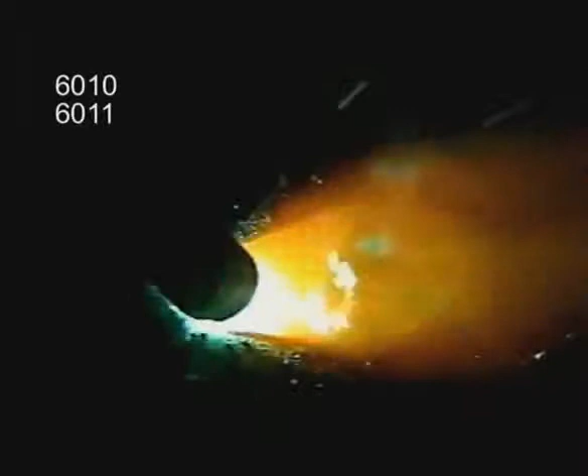All the common rods used for welding on carbon steel have characteristics that make them better suited for different situations. The fast freeze rods have a strong arc force that helps burn off surface impurities. A circular or side-to-side motion can be used to build up weld, or because of the light flux coating, these rods can be whipped to provide maximum penetration. In the vertical weld position, 6010 and 6011 can be run either uphill or downhill. These are good rods for tacking up weld joints, welding metal that is slightly rusted, filling gaps in poorly fit joints, and as a first pass for good penetration.

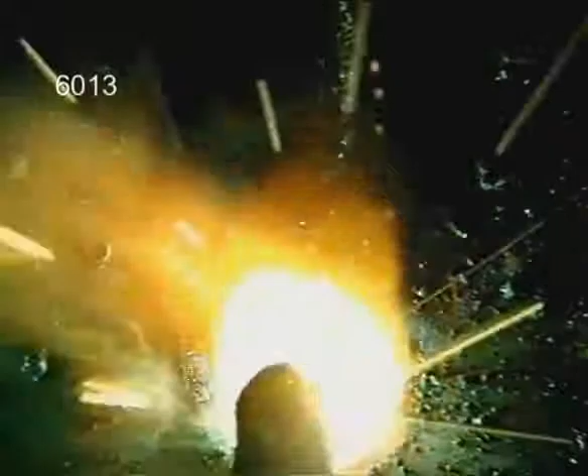The filler rods don't penetrate as deep, they build up weld. Stabilizers in the flux make 6013 one of the simplest rods to use. With a slightly heavier slag covering, try to keep the arc in the puddle. 6013 can also be run either up or down on vertical welds. For general purpose welding, 6013 produces a smoother finished weld bead.

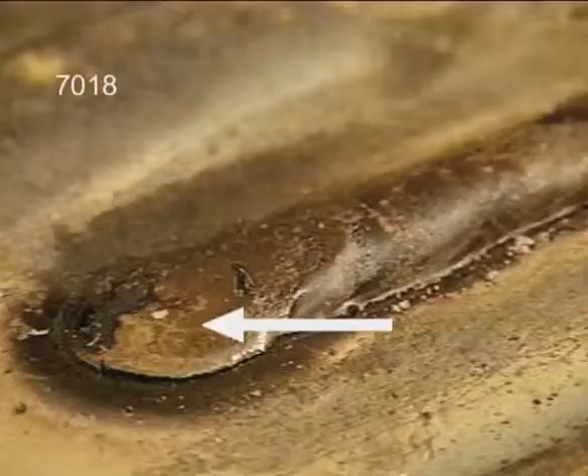7018 contains iron powder in the flux and low hydrogen characteristics. Except for directly under the arc, a heavy slag covers the entire weld puddle. Either running straight or with a side-to-side motion, the arc needs to be maintained on the leading edge of the puddle. In the vertical position, 7018 is run uphill. 7018 requires better rod control, but does provide the strongest welds for heavy stress situations and also the smoothest welds for ornamental type projects. Welding rods are available in different amounts, and it's a good idea to have both fast freeze and filler rods on hand.

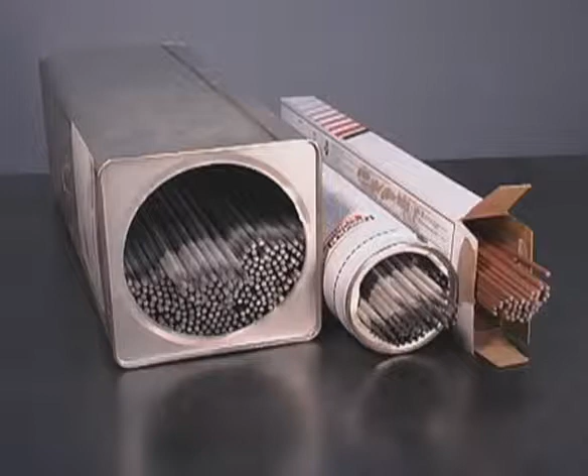Cover yourself up. Wear some good gloves, a hat, keep clean lenses in your welding hood, and always wear safety glasses. Before you light the rod, get comfortable. Scratch to light the arc. Bring the rod back and start the puddle. Maintain a uniform arc gap with the amperage set high enough to let the puddle spread out. The molten metal follows the heat. Make sure you're filling in along the edges to avoid undercut. Add a little extra metal to the puddle before pulling out back over the weld.

You should always examine the finished weld bead for any defects, but really, you need to see the weld as it's going in. This is a totally manual process. You have to control the heat and filler metal during the weld by watching and understanding the molten puddle. Look past the rod and the light, focusing directly on the molten pool. Watch the edges and the weld buildup, constantly analyzing how it's flowing out and how fluid it is, making slight adjustments when necessary. The amperage setting, which regulates the amount of current flowing through the rod, is the main control of the heat available to the weld.

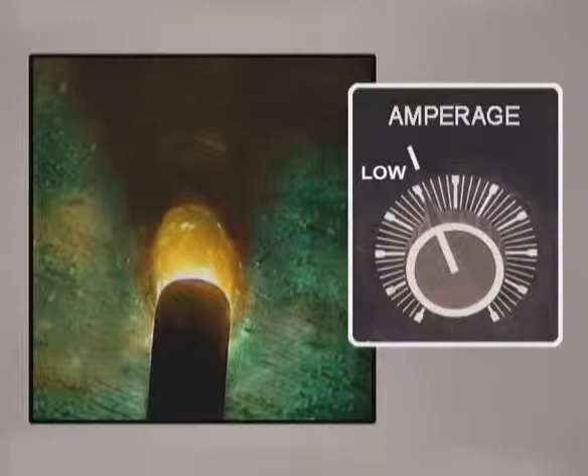When the amperage is set too low, the puddle only forms under the rod. Increasing the amperage generates enough heat to form a molten pool. Along with starting to get penetration, this is where you begin to have control of the edges of the puddle and the weld buildup. There isn't an exact amperage setting here. In fact, this is one of those things that welders see differently. Also, as the metal thickness or weld position changes, the amount of heat required will be different.

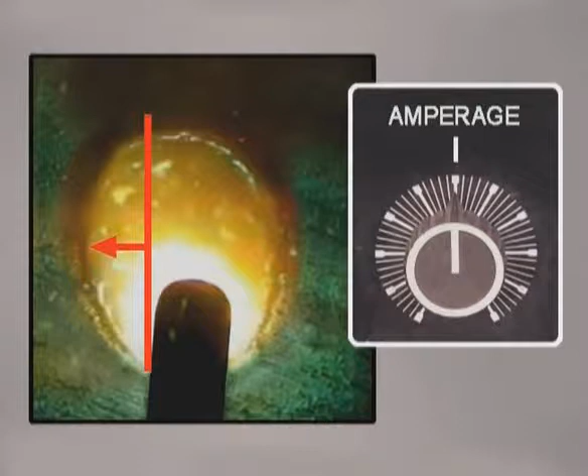Watch the puddle. You're looking for it to flow out to the sides of the rod. When the amperage is increased more, the molten pool penetrates deeper and spreads. Eventually, the filler metal becomes so fluid and agitated you can no longer control it. Experiment with the amperage setting. For good penetration and smoother welds, you want the amperage set as high as you can while keeping the molten metal from becoming too fluid to handle.

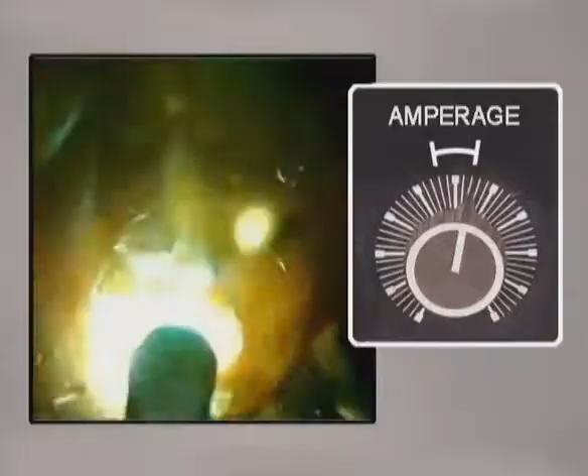Because of the characteristics of the flux coating, the puddle will look different depending on the type of rod you're using. The entire puddle is visible with 6010 or 6011. Slag covers the top rim of 6013, but the molten metal is still visible on the sides, and the puddle should move easily with the rod.

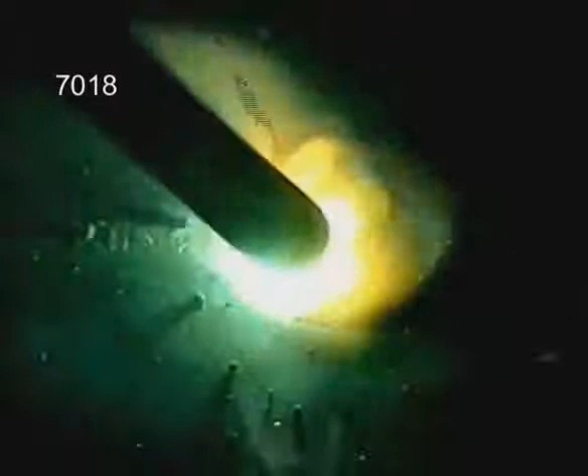With 7018, slag covers the entire puddle, but you still want to see it flowing out to the sides, with the slag solidifying back from the rod. During the weld, the filler metal is actually solidifying underneath while the slag stays molten.

In the horizontal or vertical position, the slag can run or drip. Don't let this fool you into thinking the weld is too hot. You'll probably need to experiment more to set the amperage for 7018, but you will get better results running a little to the hot side.

Regardless of which rod you use, the amperage only provides the heat. The rod angle determines how fast the metal will heat up. When the rod is held more perpendicular, the molten pool forms and spreads quickly, allowing a faster travel speed to limit penetration on thinner metals, deposit less metal for a smaller weld, or flatten the bead in a bevel.

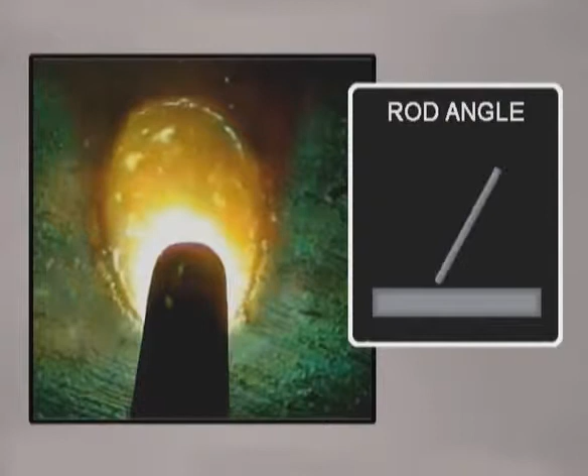As the rod is angled, some of the heat is taken off the metal. A slower travel speed can be used to build up a crowned weld bead. If the rod is angled too much, the metal won't get hot enough. The molten pool will narrow, the bead will stack up, and you'll lose control of the edges of the puddle.

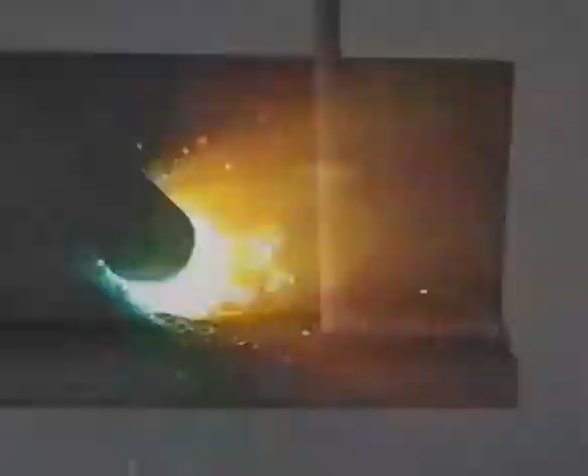On most weld joints with a good fit-up, you want to maintain a consistent rod angle to produce a uniform weld bead. In some situations, though, you may need to vary the rod angle during the weld. To fill a gap in a weld joint, the rod can be angled more, slowing down to deposit more metal, keeping the build-up uniform, then angled back up to finish the weld.

Controlling the rod angle takes a little practice, but you need to stay loose and relax. Whether you're holding the rod up to flatten the bead or angling it to build up weld, you want to travel at a speed that keeps the molten puddle the same size.

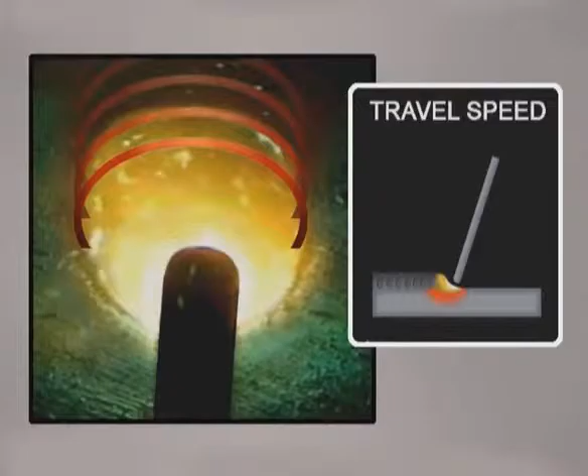Watch the puddle. If the travel speed is too fast, the metal doesn't have time to melt, so the puddle narrows. If the travel is too slow, the metal gets hotter and the puddle spreads. Depending on the rod, the filler metal may flatten out or stack up and roll. Always maintain the size of the puddle with the travel speed.

Last is the arc gap, which is the distance from the tip of the rod to the metal. Shielded metal arc welding machines use a constant current power source. The amperage is set with the voltage varying to maintain the arc.

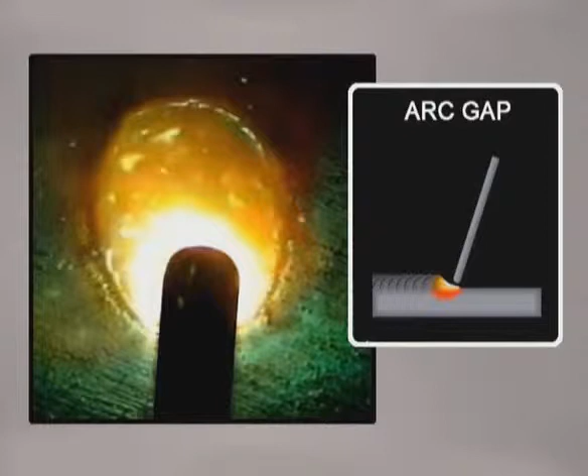You want to avoid jamming the rod right down against the metal or long arcing too far, but you can use slight variations in the arc gap to help control the heat and shape the weld. This is difficult to measure, but a medium arc length is used to build up weld. Shortening the arc reduces the heat, cooling down the weld puddle.

Try using a shorter arc gap on vertical up with 7018 when you want to build up more weld. Slightly lengthening the arc causes the heat to increase, spreading the puddle out, and is used with a more perpendicular rod angle for making smaller beads or flattening the weld on heavier metal.

It is important to be consistent though. Varying the arc gap during the weld changes the heat, making it difficult to maintain a uniform weld puddle.

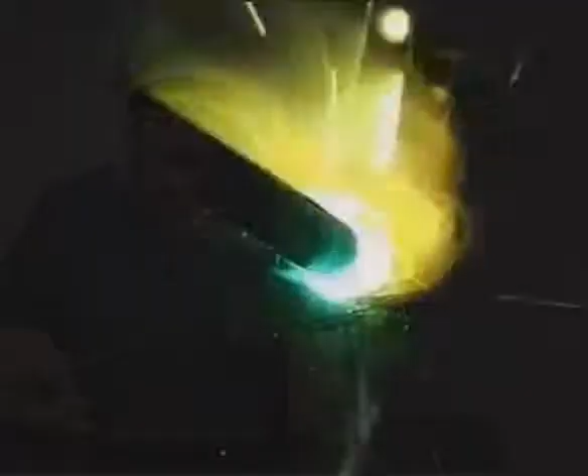When you start looking at all the aspects of running a weld bead, there are many possibilities. That's why everybody welds a little different. Practice and experiment, trying to make that puddle do what you want it to do. Watch other welders if you get the chance, but in the end, you need to see the weld puddle at the end of your rod and develop a style that works for you.

We've been looking at heating the metal to allow the molten pool to penetrate and fuse. All that heat also has an effect on the base metal itself. Metal is made up of groups of atoms bonding together to form grains.

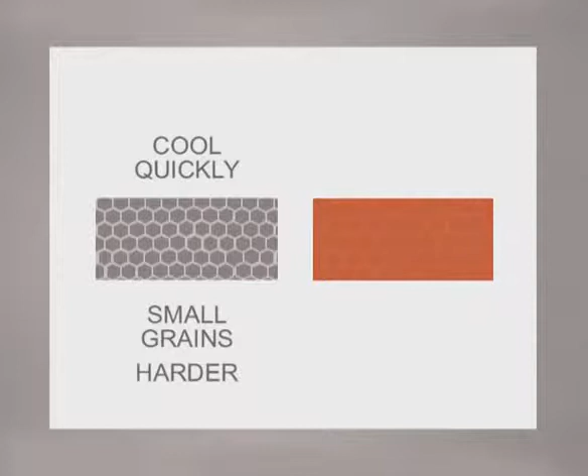When metal is heated past a certain temperature and cooled quickly, smaller grains are formed, making the metal harder. Cooling the metal slowly allows more atoms to bond, forming larger grains, which makes the metal softer. In welding, the metal adjacent to the weld bead becomes hot enough to change the structure of the grains. Because only a relatively small area is heated, the metal cools quickly, forming smaller grains and becoming harder right alongside the weld.

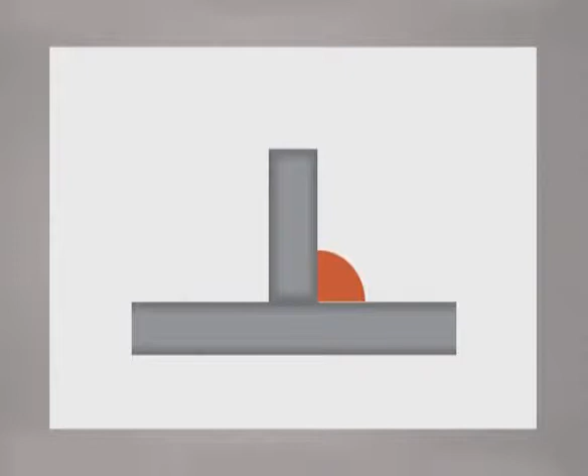Welding also causes the pieces of metal in the joint to draw. Heated metal expands, so during the weld, the molten filler metal is deposited in its maximum expanded state. As it cools, it contracts. When the metal is free to move, it will draw in the direction of the weld.

If the pieces being welded are clamped, the molten weld metal still contracts, leaving some residual stress in the metal. There isn't any way to stop this. The metal is going to move. Whenever possible, weld on both sides to reduce the draw, and on pipe or square tubing, use a sequence of welds to help control the draw.

Extreme differences in temperature do have a greater effect on the metal. If it's freezing cold, use a torch to heat the metal up a little. Condensation will appear, and just warm it up until the moisture dries. Also, if you are welding on harder, higher carbon steel, which does not handle expansion and contraction very well, a preheat may be necessary to prevent the weld from cracking as it cools.

As always, there are a lot of variables, the type of steel and the stress that will be put on the finished product. In most cases, projects are designed so that the stress put on the weld joint does not come anywhere close to the maximum strength of either the metal or the weld. Try to complete the weld once you start it and avoid building up more weld than necessary. When you're finished, let the metal cool slowly. If the metal does break next to the weld, you may need to take a closer look at the thickness of the metal being used and the overall design.

Okay, let's take a look at putting two pieces of metal together.

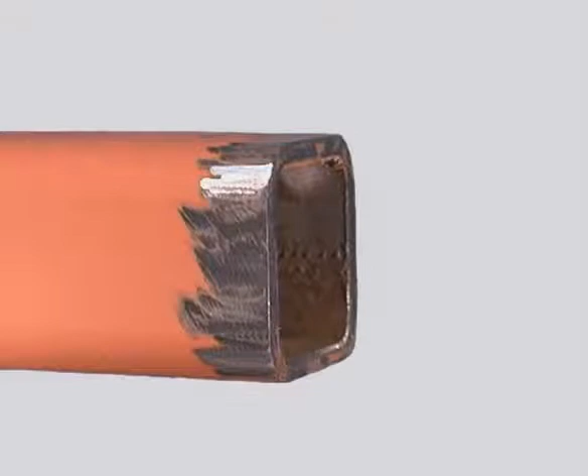The first steps with any type of weld joint are metal preparation and joint fit up. If you're working with new metal, most of the rods can handle the mill scale, which is a dark layer on the surface. Use a grinder to clean any metal that's rusted or painted. Impurities on the surface can cause porosity, lack of fusion, or even interfere with the arc.

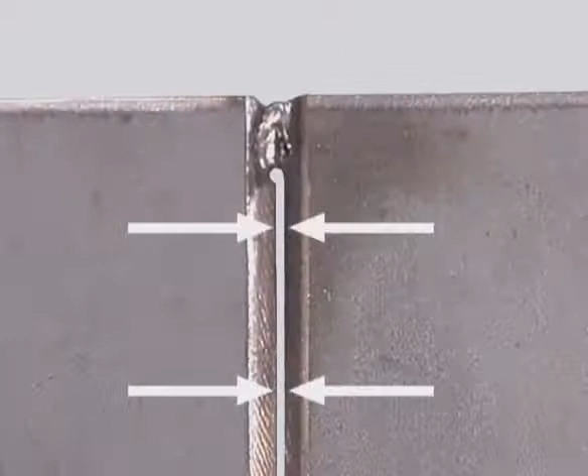When you're cutting metal, keep the edges straight and square. If you use a torch, chip or grind off any slag left from the cutting process. During fit-up, use good tacks to hold the pieces together, and if you're leaving a gap, keep it uniform. Irregular gaps in the joint not only take longer to weld, they make it way more difficult than it should be. You can avoid a lot of problems by cleaning the metal and taking your time on fit-up.

While there are many variations of weld joints, there is generally considered to be 4 types: butt joints, lap joints, T-joints, and corner joints. On a butt joint, the weld should penetrate deep, with the amount of weld deposit at least equal to the thickness of the metal. For maximum strength, 100% penetration welds are used to completely fuse the edges.

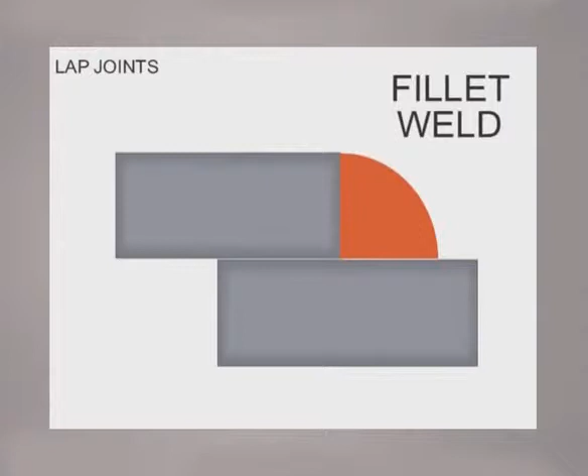On a lap joint, the weld is called a fillet, with the legs coming up and out a distance equal to the thickness of the metal and the weld slightly crowned. A fillet is also used on T-joints, where the edge of one piece is joined to the surface of another. Welding on both sides reduces the amount of weld necessary and overall produces a stronger joint. Corners are joining the edges at an angle, with metal preparation or fit-up allowing for sufficient penetration and weld deposit.

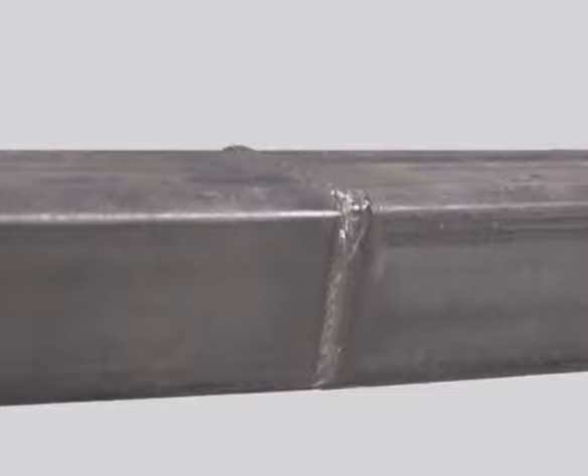Let's start with butt joints, and this can be on plate, flat bar, angle iron, pipe, or square tubing. When the metal is around 1/8 of an inch thick, keep the edges straight and square for a perfect fit. You'll generally get good enough penetration just butting the pieces together, especially if you can weld on both sides or all the way around. On plate or flat bar, tack right on the outside edges to help carry the heat.

For square tubing, tack the corners, then weld opposite sides from tack to tack. If you intend to grind the weld off for a smooth finish, you can leave a very slight gap, but keep it uniform. Whenever possible, start at the outside edge and weld towards more metal.

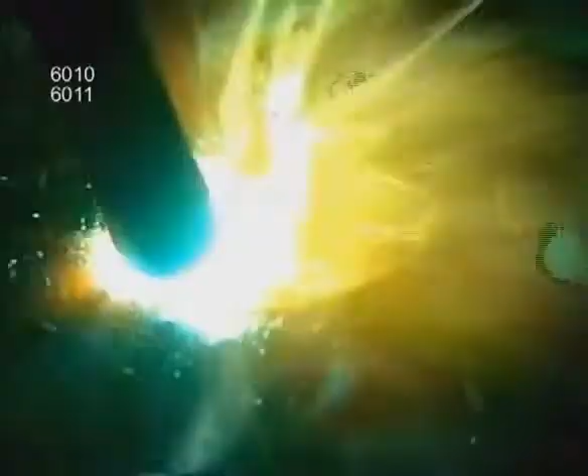In the flat position, hold the rod fairly perpendicular to the metal. You can weld with 6010 or 6011 using a circular motion. Turn the amperage down a little, but you're going to have to travel faster to control penetration and avoid burning through. For a smoother finished bead, try 6013 or a 3/32 7018 with a side-to-side movement.

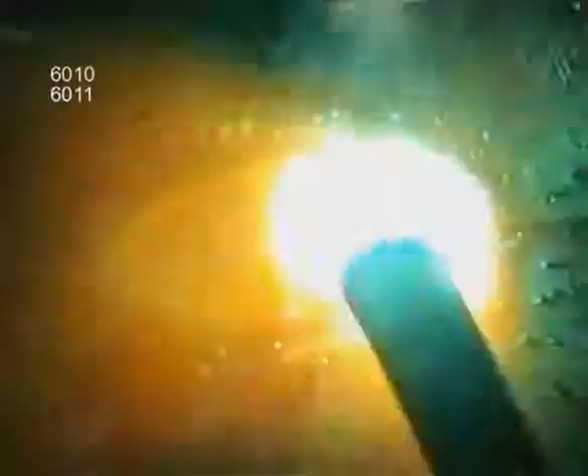On a horizontal, hold the rod nearly perpendicular to the weld. Watch the puddle. With 6010 or 6011, adjust the travel speed to let the puddle spread out without overheating the metal. Watch the top side to avoid undercutting. With 6013 or 7018, try running straight without any rod movement, maintaining a uniform arc gap and travel speed.

If you can position the joint, butt welds on 1/8 metal are easier welded vertical down. 1/8 metal is fairly thin for stick rod, so use some practice metal to figure out the amperage and adjust your travel speed.

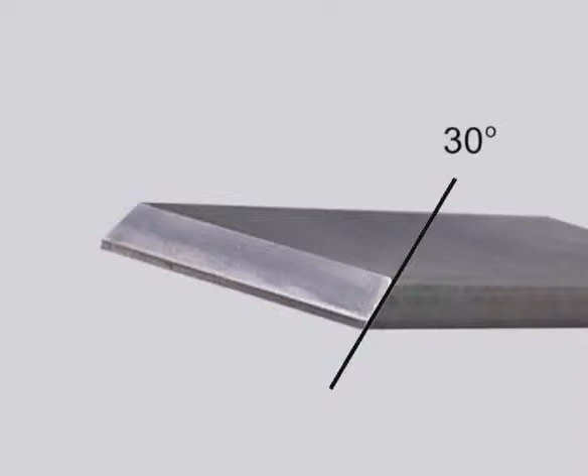Starting at 3/16 of an inch, you want to bevel the edges to allow for good penetration. Bevels are generally around a 30-degree angle, with the top edge straight and a flat spot called the land on the bottom. Hold the grinder at a slight angle, using the bottom corner of the disc to take off metal. When you have it close, hold the grinder flat to smooth the bevel and straighten the top.

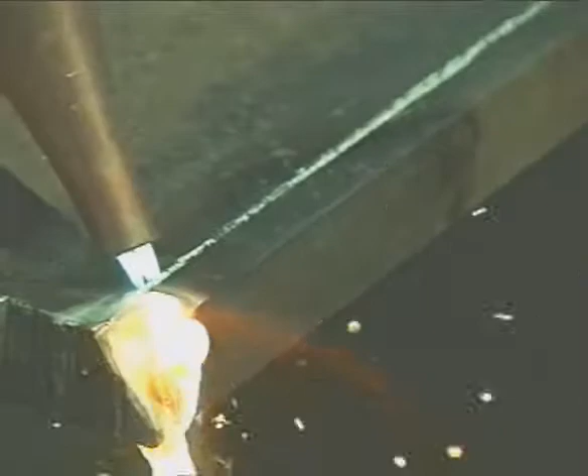On heavier metals, it may be easier to cut the bevel with a torch, then finish it with a grinder. The reason for beveling the edges is to control the puddle deep in the joint. If the bevel isn't wide enough to get the rod into the bottom, you can always take the grinder up on edge, slightly cock it, and use the curve of the disc to open the bevel up a little more.

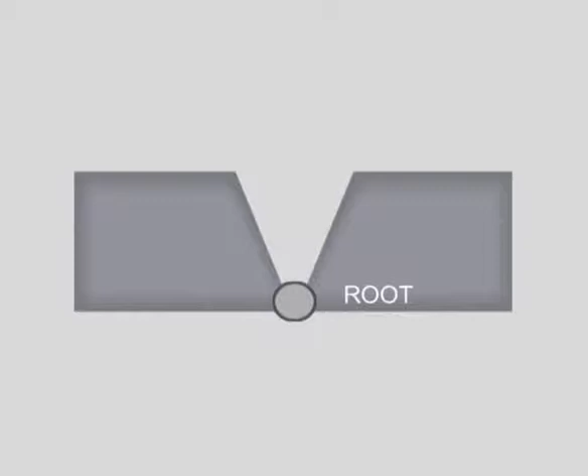A beveled butt weld can be divided into 3 parts: the root, which is the first pass fusing the bottom of the joint, the filler, and the cap.

There are several options in fitting up butt joints, and the main difference is how the root pass is welded. The bevel pieces can be fit up with a small gap, allowing the first pass to penetrate as deep as possible. For 100% penetration, either a backup bar is used, with the first pass fusing all 3 pieces, or the metal is fit up with a gap, and the root fuses the bottom edge and actually builds weld on the back side. After the first pass, filling and capping is basically the same.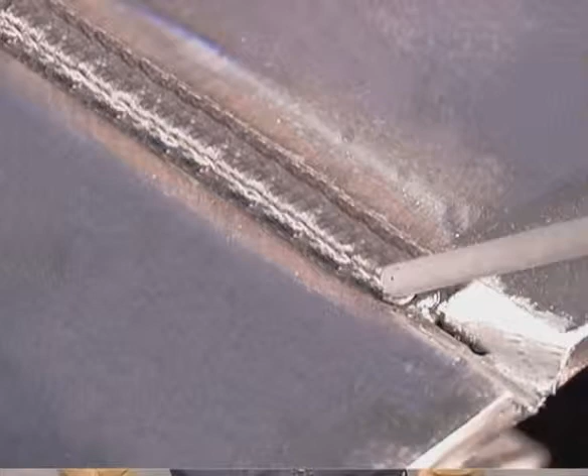Let's take a closer look at getting the joint started. Anytime you weld in a bevel, you want to hold the rod fairly perpendicular to the metal to flatten the top of the bead. If you angle the rod, the weld bead will crown, leaving slag that may get covered on the next pass. You also want the weld buildup even.

Use a grinder to knock down any high spots from stopping and starting. It's a lot easier to keep it uniform with a grinder than to try to fix it with the next weld bead. Also, if the bead does crown in the bevel, use your grinder to knock off the top to avoid trapping slag.

Not all welding situations require 100% penetration. That depends on the type of stress placed on the joint. But you always want to bevel the metal, leaving at least a small gap. 6010 or 6011 will provide good penetration, and for the first pass are a little easier to deal with in any of the weld positions.

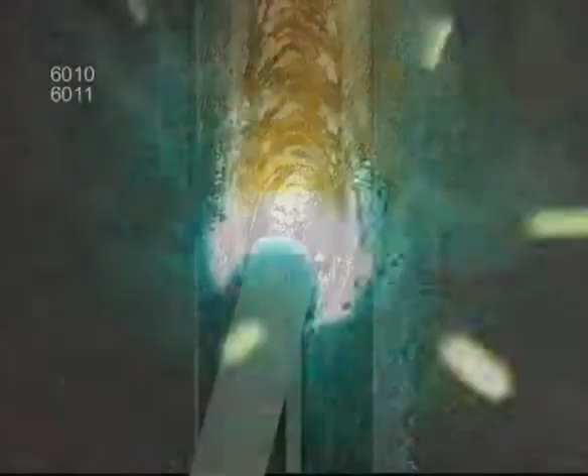You can use a whip or step motion, gouging into the metal for penetration, then pushing the puddle in to fill. Watch both sides to avoid undercutting along the edges. For more weld buildup, try using a modified circular motion, always coming back to the leading edge of the puddle in the bottom of the joint.

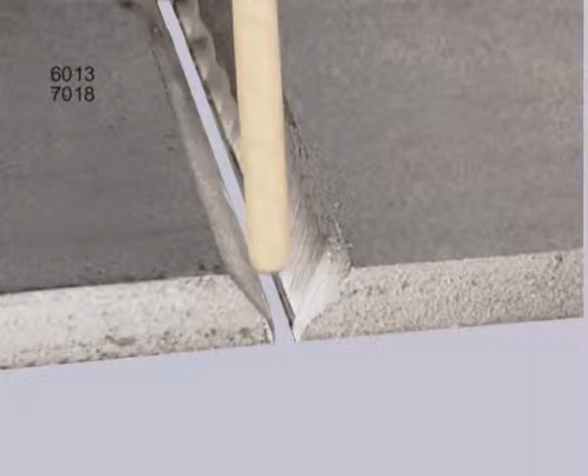If you can handle the puddle, you can also use a filler rod. With 6013 or 7018, hold the rod fairly perpendicular. Use a slight side-to-side movement and avoid jamming the rod into the sides. Depending on the bevel and gap, you may need to follow the metal to maintain a uniform arc gap, as the base metal is getting thicker as you come up the bevel, taking more heat.

During the weld, you want to see the edges of the puddle flowing out and tying in on the sides of the bevel. After the first pass, chip the slag, clean it with a brush, and you're ready to fill and cap.

If you can get to both sides of the metal, you can weld the backside for a stronger joint. Grind down to clean metal, keeping the depth and width uniform. With the rod angled a little more, slow the travel speed and build up welds slightly wider than the groove and above flush with the surface.

Some welding situations require complete penetration for strength. If the pieces being joined do not fit up perfectly, or with some grades of hardened steel that tend to crack on the first pass, a backup bar is used.

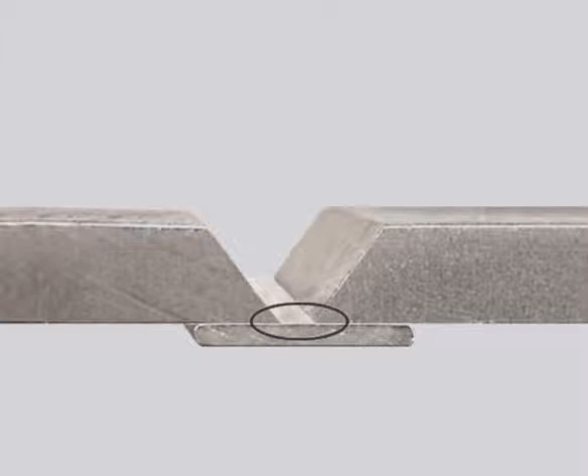A V-bevel with a backup bar is also the procedure for structural welding tests. The goal is to melt and fuse the bottom edges of the pieces being joined to the backup bar. Prepare the bevels with slightly less of an angle and a feathered edge. Grind off the mill scale on the backup bar. Only a narrow strip is going to get tied in, and you don't want surface impurities taking the heat.

Fit the backup bar tight with around a 1/4 inch gap. This type of joint is generally welded all the way with at least an 1/8 inch 7018, and you have to be able to get the rod all the way to the bottom.

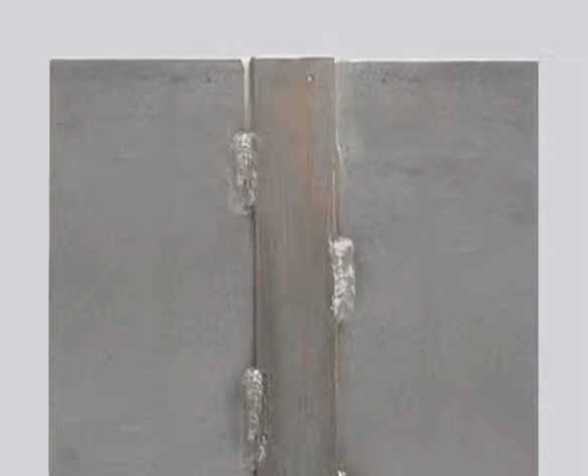Either tack up on the backside, staggering the tacks, or in the bevel. When you tack in the bevel, grind the starts and stops thin. Always keep in mind, along with fusing the pieces at the bottom, you also want the top of the weld relatively flat to avoid trapping slag.

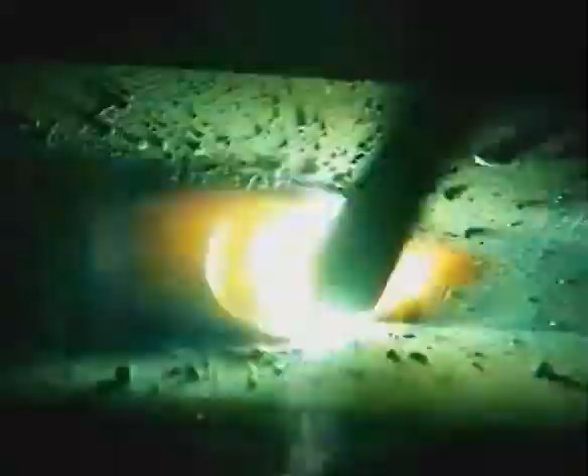In the flat position, hold the rod nearly straight up and down, angled slightly back towards the weld. Keep the arc on the leading edge of the puddle. With a slight side-to-side movement, pay attention to the arc gap. You want to see the edges of the molten pool tying into the sides of the bevel to avoid crowning the bead.

When you're using 7018 in a bevel, stay ahead of the weld buildup and slag. If molten slag is pushed in front of the rod, it can interfere with the arc or limit filler metal fusion along the sides. On vertical up welds, you won't have any problems fusing the base metal to the backup bar. You do want to keep the weld bead flat without undercutting along the edges.

Keep the rod fairly perpendicular to the metal, angled up slightly. The puddle needs to flow out on the sides for a flat weld bead and to avoid undercutting. Travel up fast enough to keep the metal from overheating, which causes the molten puddle to spill down. You may need to lower the amperage a little, maybe 5 amps or so, but don't lower it too much, as many problems are caused by running too cold on verticals as by running too hot.

Remember, the amperage only provides the heat. It's the travel speed, rod angle, and arc gap that determine just how hot the metal is going to get.

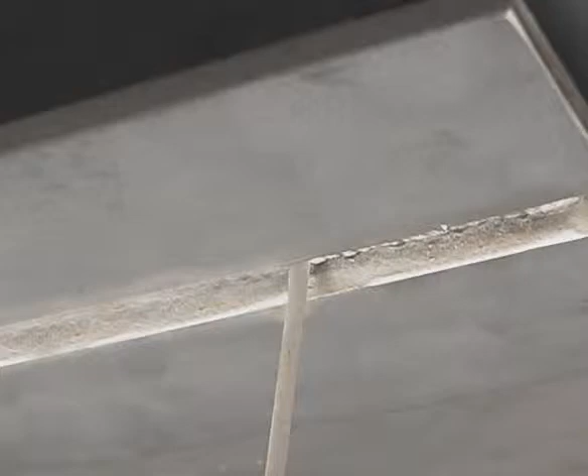On overhead butt joints with a backup bar, you don't get to build up quite as much weld bead. With the rod nearly straight up and down, adjust the travel speed to let the puddle spread out without overheating the metal. Most of the problems with overhead come from not controlling the rod. When the tip dances around, varying the arc gap, the amount of heat at the weld is not uniform and focused. Find some way to steady yourself so you can control that rod.

Also, if the rod is angled too far back towards the weld, the molten filler metal takes the heat instead of the metal, causing the puddle to drip.

Horizontal is generally not used for welding tests, but you often get them in practical situations. Angle the rod up and slightly into the weld. The bottom bevel acts as kind of a landing, helping to hold the weld, so you may be able to use a slight rod movement.

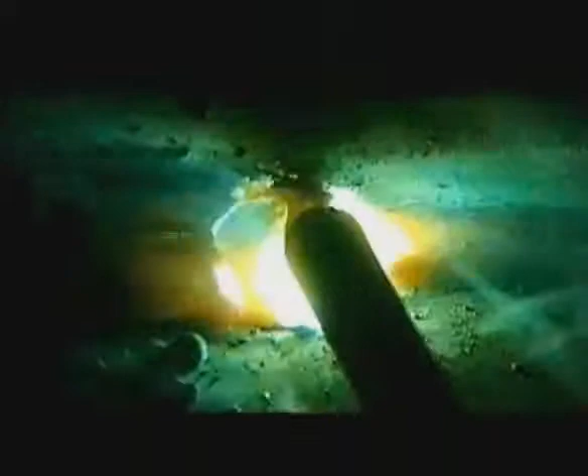Watch the top side and push the puddle up. Set the amperage to allow a fast enough travel speed so the base metals don't overheat, which causes the puddle to become too fluid. Don't try to carry a lot of metal on a horizontal. Just get all the pieces tied together and keep the filler metal from sagging.

The last type of root is in a V-beveled open butt joint. We're going to shove a 6010 rod deep into the gap and run a weld bead on the back side of the metal. Preparation and fit up are more critical, so take your time getting the metal ready.

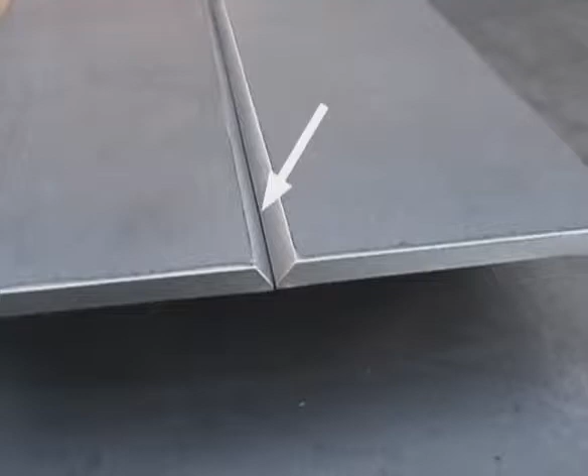The edge of the bevel needs to be straight and square. Grind off all the mill scale on the bottom side. A half-round file works good to clean up the inside of square tubing or pipe. The landing should be uniform. Use a file to knock down any high spots.

With a 1/8 6010, I use a 1/16 oxyacetylene welding rod as a spacer with around a 16th landing. The size of the gap and landing can vary a little, but when you figure out what you like, try to keep it consistent for every weld you make.

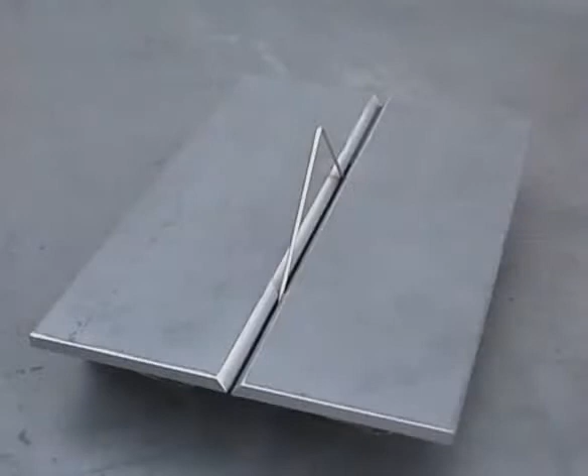Line up the bottom edges of the metal. With a spacer to adjust the gap, run one tack, pushing the rod right down into the gap. Before you finish tacking up, remove the spacer. As tacks cool, they contract and the spacer gets jammed up. So pull the spacer, make sure the gap is uniform, and finish tacking the joint.

On heavier pieces, after the first tack, use a small wedge or a screwdriver to keep the gap uniform. Because of the taper, you can remove these after the joint is completely tacked. On square tubing, tack opposite corners. For pipe, opposite sides. Make sure the gap is uniform, straightening when necessary, then put in two more tacks.

Flat, horizontal, overhead, and vertical down root passes are all done the same way. Grind the edges of the starts and stops thin. Hold the rod perpendicular to the metal. Scratch start right on the tack. Push the rod down into the puddle and start moving.

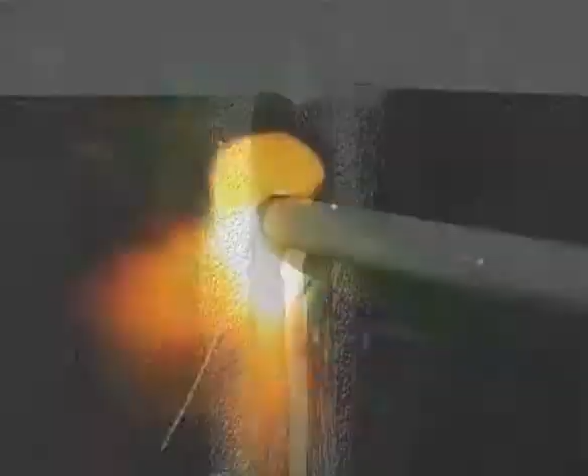The filler metal will squirt out the back until you hit the thinned out edge of the tack, and it can poke through. Then move as fast as you can keep the gap filling in. If you're not getting all the way through, you will see filler metal squirting out behind the rod, back up in the bevel.

Most of the light and sparks will be on the back side, and you're building weld on the back of the metal. You want the amperage relatively high, so try starting about the same place as you'd run flat. If you do open a hole, stop right away, pulling the rod back over the bead. Restart right at the edge and keep going. When you finish the weld, grind the edges thin on both sides of the hole and fill it in.

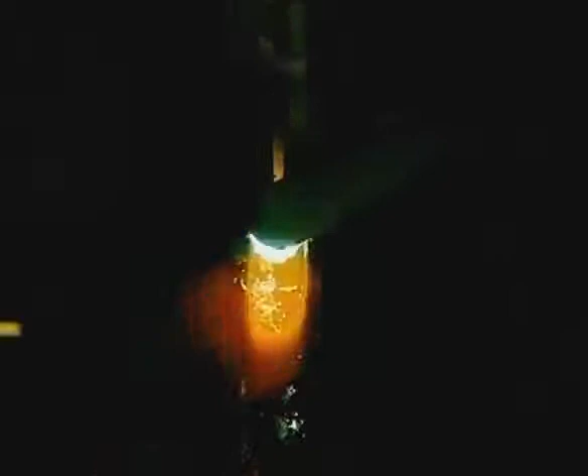Some welding procedures require a vertical up root pass, and generally you'll need to run about 5 amps lower for uphill. The easiest way is to prepare the metal exactly the same, with a uniform narrow gap, shoving the rod in perpendicular and moving up as fast as the gap fills in.

Some welders like to thin out the landing a little more, and with a step motion, rip a small keyhole, then fill it in, rip a hole, and fill it in, always keeping the rod deep in the gap. Other welders like to leave a little thicker landing and wider gap, here again using a step motion, laying metal in and making sure it's fusing on the bottom corners.

The disadvantage to stepping the root is the possibility of undercutting along the edges on the back side. The advantage is that you actually see the root going in for 100% penetration. Stepping the root uphill also works well when the gap is uneven, with wide or narrow spots.

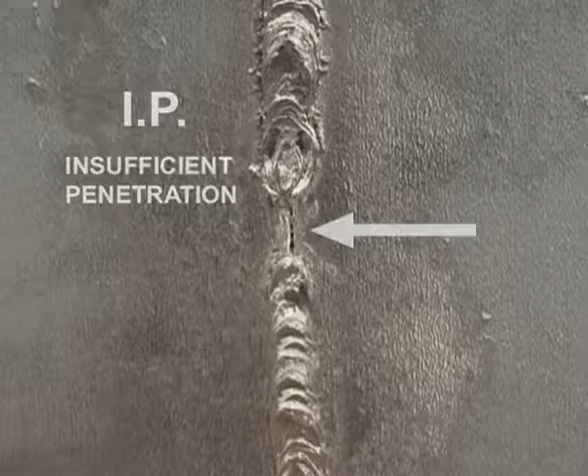The backside bead should be above flush, with the entire bottom edges of the bevels melted and fused. Any missed spots are called insufficient penetration. If the travel speed was too slow, the bead stacks up on the backside, causing excessive penetration.

On the front side, because the rod was jammed right down against the metal, the bead will crown and undercut along both sides. Grind this out to avoid trapping slag. The metal will be thin from grinding, so you need to run another bead called a hot pass to add a little more metal and burn out any slag left behind.

With 6010, try stepping in the hot pass, not gouging quite as deep on the backstroke. Use a faster travel speed so you don't burn through, and watch the sides to avoid undercutting.

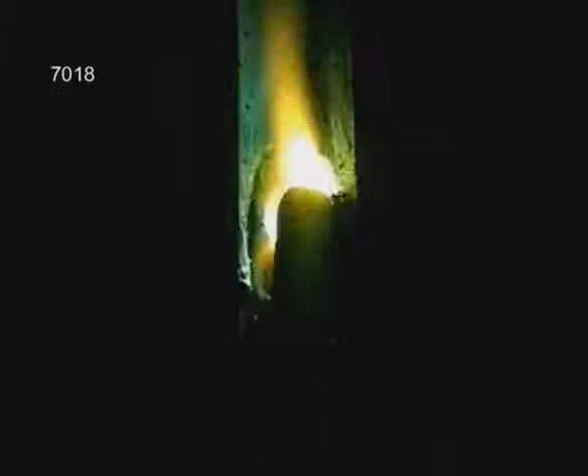You can also hot pass with a 3/32 7018. Hold the rod fairly perpendicular. Carry the heat on the sides, moving across the center relatively quick. Don't try to build up a lot of weld, and make sure the sides of the puddle flow out so the top of the weld stays flat.

Once the bottom of the joint is fused with any of these procedures, you're ready to fill and cap, and you will get better results using 6013 or 7018. If the metal isn't too thick, you may be able to finish with one more pass.

On heavier metal, when more filler is required, remove all the slag between passes with a chipping hammer and wire brush. This comes with experience, but plan the weld. When several filler passes are required, overlap the edges of the previous beads if possible.

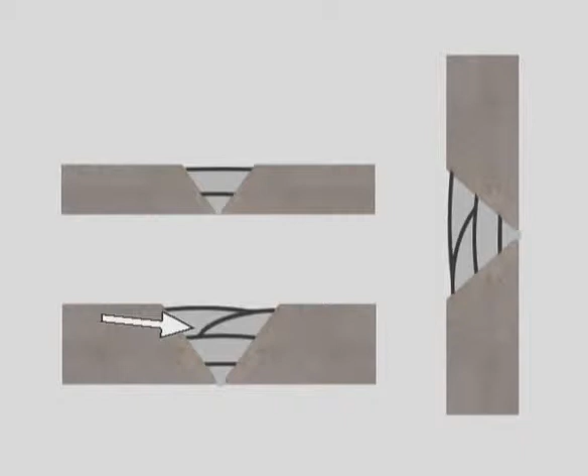The last filler pass should be slightly below flush. Try to leave the top corners of the bevel. With a slight side-to-side movement, pay attention to the arc gap. Don't jam the rod into the sides of the bevel.

Keep the rod fairly perpendicular and the puddle flowing out to avoid crowning the bead. You may need to speed up or slow down to control the amount of filler metal deposit, but try to leave the top corners of the bevel.

To cap the weld, angle the rod and slow down to build up a crown weld bead. Use the edge of the bevel as a guide to keep the sides of the weld straight. The finished weld should be as thick as the metal, so if you've penetrated deep, the cap only needs to be slightly wider than the bevel and above flush with the surface of the metal.

Filling up more weld than you need doesn't add any strength, just takes longer and puts more heat on the metal. If the top of the bevel is too wide to cap with one bead, run 2 or more passes side by side to cap the weld.

With a slight side-to-side movement, using the bevel as a guide, keep the outside edge of the first bead straight. Use the inside edge of the bead as a guide for the second pass. Adjust the travel speed and rod movement so the puddle flows out almost to the center of the first bead. The final pass will generally be smaller.

Try holding the rod more perpendicular to the metal, running straight. Use a faster travel speed for less weld deposit. On a horizontal, angle the rod up slightly with a medium arc length. Try running straight without any rod movement.

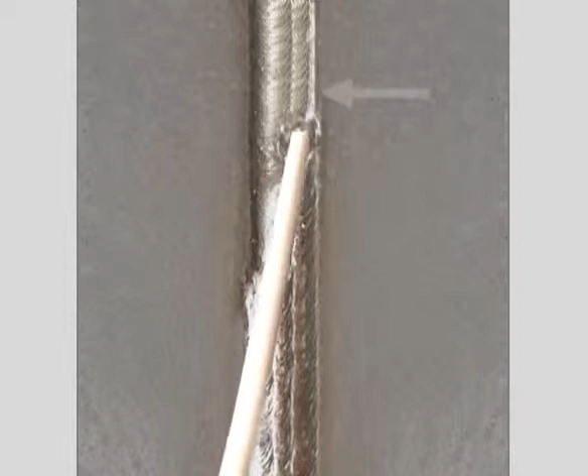On verticals, you can either use small beads side by side or run a weave bead. Small beads are easier. Use the edge of the bevel to keep the first pass straight. Run as many beads as it takes, but try to leave the other side of the bevel for a guide to keep the final pass straight.

If you're not limited to a maximum bead width by a welding procedure, you can try a weave bead. Start on one side, letting the puddle flow out to cover the edge of the bevel. Cross the center relatively quick to the other side and hesitate until the puddle flows out and covers the edge. Move the rod up a little, then cross, hesitate, move up, and cross.

The upward progress is going to be slow, heating the base metal up more, so turn the amperage down a little. Use the edge of the bevel as a guide to keep the sides of the weld straight. For a smooth weld and straight edges, maintain a uniform arc gap and keep the upward progression tight.

Weaving makes it possible to build up a lot of metal, but takes some practice to consistently produce a uniform finished weld bead. Whether you're filling or capping, you need to experiment with the amperage, rod angle, and travel speed, learning to control the amount of weld deposit and figuring out just how much metal you can carry without having it sag or drip.

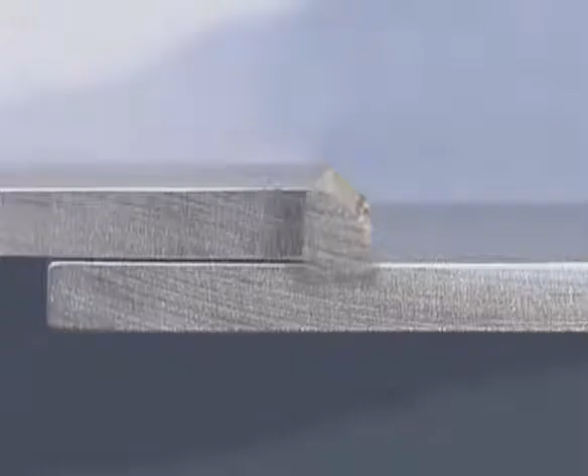With the butt joint, we were joining the edges of the metal. When one piece overlaps the other, it's referred to as a lap joint. The edge, and especially the top corner, is going to get hot and melt faster than the surface, where the heat is being dispersed in all directions. You want to fuse the bottom corner while building up a full fillet with a slightly crowned weld bead.

Lap joints can be welded all the way with a fast freeze rod, but the filler rods will produce a smoother finished weld. In the flat position, the weld is called a horizontal fillet, and you have two rod angles to consider, one in relation to the metal and the other to the weld bead itself. In relation to the metal, the rod angle determines the position of the fillet in the joint. The angle in relation to the weld controls the shape of the bead.

Holding the rod perpendicular heats the metal quickly, spreading the puddle for a flatter weld. As the rod is angled back, the weld starts to crown. There are a lot of variables. You have to watch the puddle.

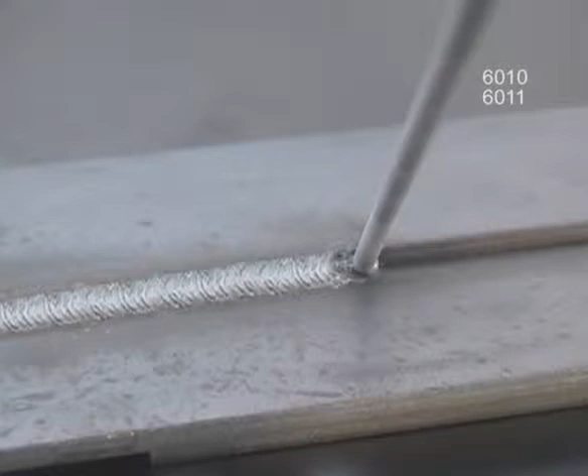With 6010 or 6011, hold the rod nearly perpendicular to the weld. With the arc on the leading edge, move the puddle into the bottom corner. Push it up to the top edge and bring the rod around to the leading edge. You may need to speed up or slow down to provide the heat, but always bring the arc back to the leading edge to fuse the corner.

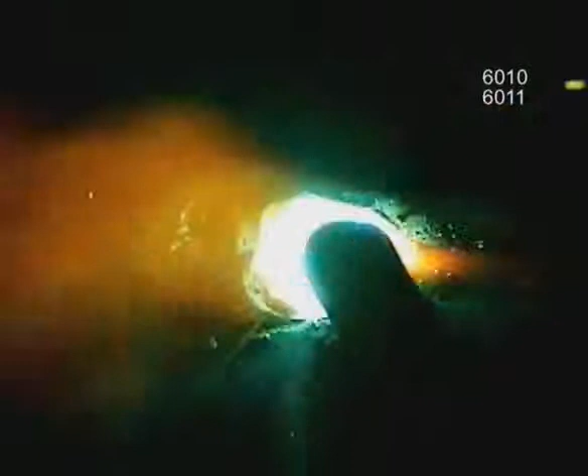Watch the puddle flowing out to the top edge and tying in on the bottom. The fast freeze rods provide excellent penetration, but tend to produce a flat or concave weld. Even on thinner metals, it may take a second pass to build up a full fillet.

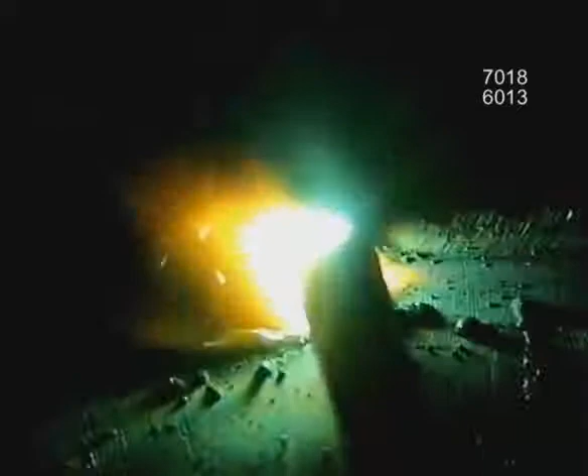The filler rods build up a smoother weld. Maintain a constant arc gap for a uniform weld bead, adjusting the travel speed and rod angle so the puddle flows out all the way to the top edge. Because the filler metal remains fluid longer, try running straight without any rod movement, keeping the arc on the leading edge of the puddle. On thicker metal, you may not be able to make a full fillet in one pass.

You might be able to get it in two passes. The first one smaller and flat, then slowing down to carry more metal and crown the bead on the second pass. It might take 3 or more passes, and on heavy welds, use 7018 to prevent the bottom beads from cracking. Put the first one in fusing the bottom corner.

Chip off all the slag and wire brush the weld. Determine how far out the weld needs to be, and holding the rod straighter up and down, angled slightly back towards the weld, run a bead keeping the outside edge straight. Angle the rod more into the joint and perpendicular to the weld. Then run a second pass filling to the top edge.

Overhead fillets really are like flat welds, just more awkward. Angle the rod into the corner with slight adjustments for different thickness metals. Keep the rod nearly perpendicular to the weld. Watch the puddle flowing out to the edge of the lap piece. As long as you keep the filler metal and base metal from overheating, that weld will stay right up there.

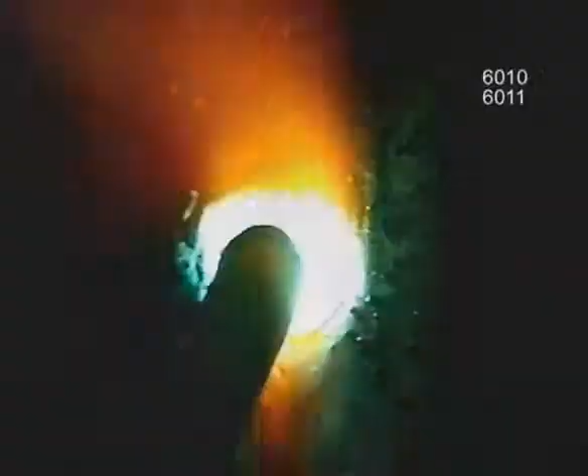On vertical lap joints, the outside corner is going to heat up a lot quicker than the surface. For vertical down welds, angle the rod up slightly. Carry the heat on the back piece. Move into the corner, pushing the puddle to the edge, then back out. Adjust the travel speed to stay ahead of the puddle and make sure you're on the leading edge of the puddle to move into the corner.

You aren't going to build up a lot of weld on a vertical down, so you'll probably need to run a second pass. Vertical up with 7018 will not only provide a stronger weld, you can also build up more filler metal in one pass.

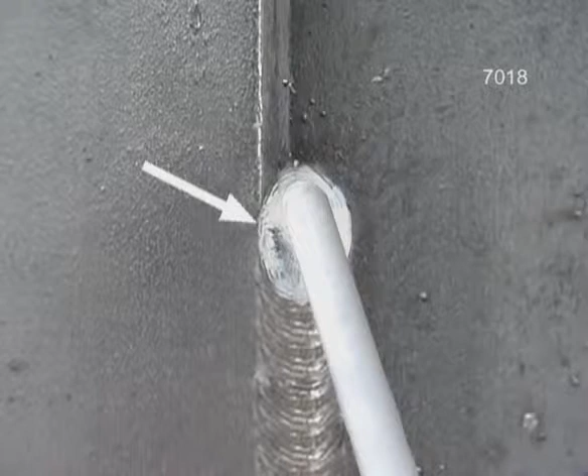Always keep in mind that 7018 is very sensitive to the arc gap. You don't want to jam the rods into the sides or long arc across the center. Carry the heat on the back piece. As soon as the puddle flows out, move into the corner, letting the filler metal flow to the outside edge, even pulling the rod out a little if necessary to maintain a uniform arc gap. Then back into the corner and across, slowing down to let the puddle flow out.

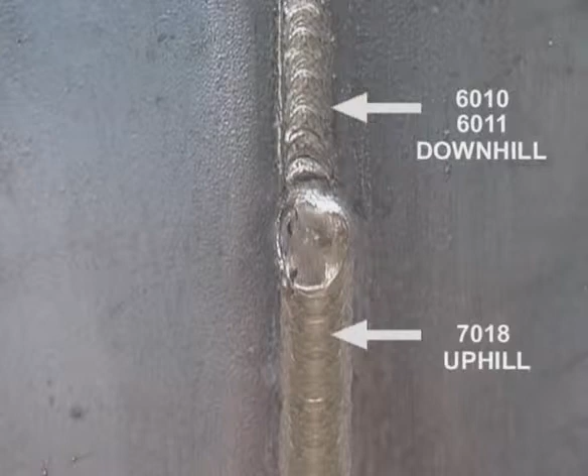Keep the upward progression tight and use a high enough amperage setting so you don't have to wait for the puddle to tie in. If you have any trouble running an uphill fillet with 7018, try starting out with a 3/32 diameter welding rod. The smaller puddle is easier to control. You can also try stepping in a downhill pass of 6010 or 6011 first. This not only provides good penetration, it fills in the corner, making it easier to maintain a uniform arc gap for welding uphill. For heavier metal and more weld buildup, you can either stack weld beads side by side or use a weave bead.

Lap joints in any position are fairly easy to weld. The outside corner will melt away, especially on thinner metal. If the top edge isn't uniform, hold your grinder flat and skim along the edge to straighten it up.

A fillet weld is also used on a T-joint, and this is very similar to a lap weld, except you don't have that outside edge heating up quickly. On a T-joint, the top side of the weld is going to require more heat, so angle the rod into the corner to push the puddle up. If the rod is not angled enough to allow that molten pool to flow out to the top, you may leave undercut.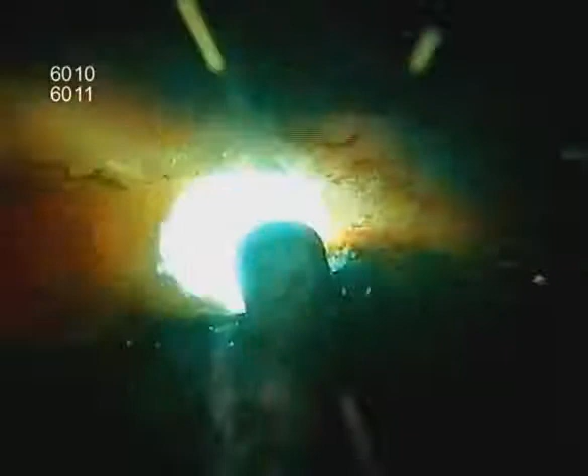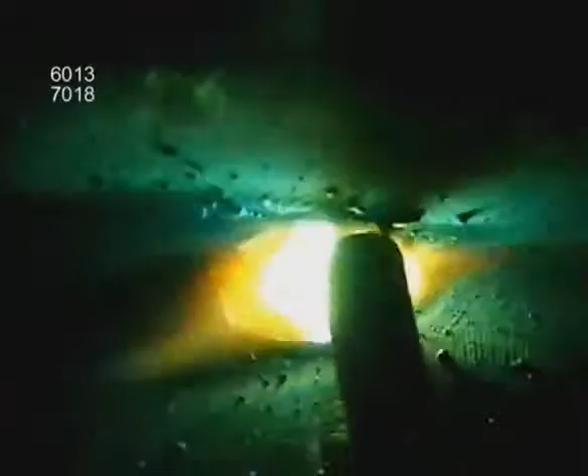With 6010 or 6011, always bring the arc back to the leading edge to fuse the corner. Angle the rod to push the puddle up. Watch the top side to avoid undercutting. The filler rod, 6013 or better yet 7018, will provide more weld deposit. In the flat position, hold the rod nearly perpendicular to the weld, making sure the molten pool is flowing out both on the top and the bottom. Try running straight, maintaining a uniform arc gap and travel speed. If you need a bigger weld, try using a larger diameter welding rod or stacking up weld beads.

Overhead is the same as flat. Hold the rod nearly perpendicular to the weld, angled to push the puddle up. Maintain a uniform arc gap and travel speed, not letting the metal or the weld deposit overheat. For more weld, stack beads from the top down.

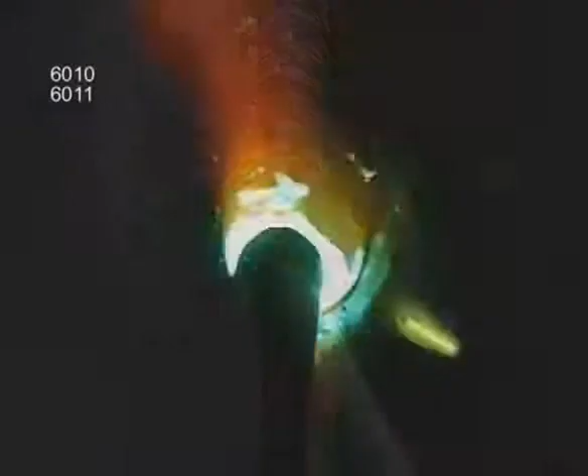On a vertical T-joint, downhill is easier. Use a modified circular motion, always coming back to the leading edge, then pushing the puddle out to the sides. Set the amperage high enough so the puddle spreads out and travel fast enough to stay ahead of the molten filler metal. Watch both sides to avoid undercutting along the edges.

7018 uphill will build weld faster. For the first pass deep in the corner, angle the rod up slightly. Pay attention to the arc gap, following the base metals into the corner and along the sides. This is very subtle. It's just a little movement into the corner as you're coming across, but jamming the rod into the sides cools the weld down, and long arcing across the center creates more heat.

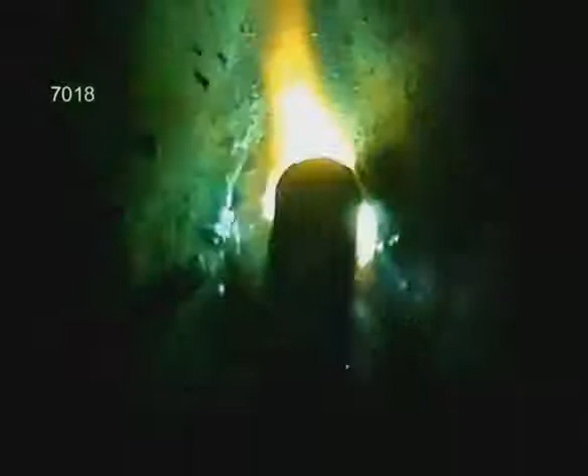Most of the problems with running uphill come from not maintaining a consistent amount of heat. When the arc gap varies, the heat varies, making it difficult to adjust the travel speed to keep the filler metal from spilling down. Try to maintain that arc gap. As soon as the puddle flows out to the side, move into the corner and across to the other side.

Let the puddle flow out and move back. Set the amperage and adjust the travel speed so you don't have to wait too long on the sides. As you gain experience and physical control of the rod, you can try to carry more metal uphill. But while you're learning to weld, just get that first one deep in the corner, keeping it uniform and avoiding undercut.

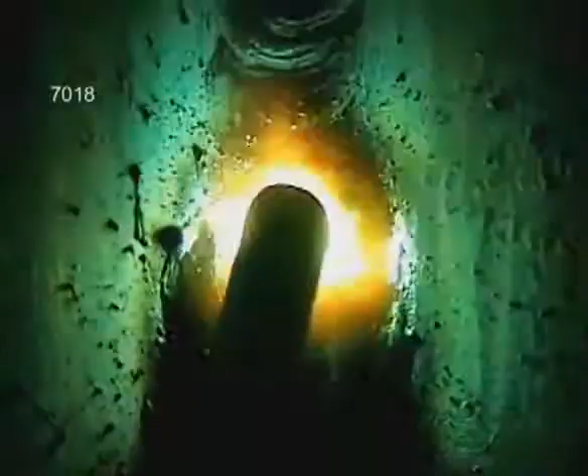If you need more weld, maintaining the arc gap on the second pass is a lot easier. Depending on the amperage setting, slow down or hesitate on the sides until the puddle flows out. Move across the center a little quicker and slow down to let the puddle flow out on the other side. Then just side to side, keeping the upward progression tight.

For heavier metal and more weld buildup, you can either stack weld beads side by side or use a weave bead. T-joints in any position will draw in the direction of the weld. If you can get to both sides, alternate welding on one side, then the other until you're finished.

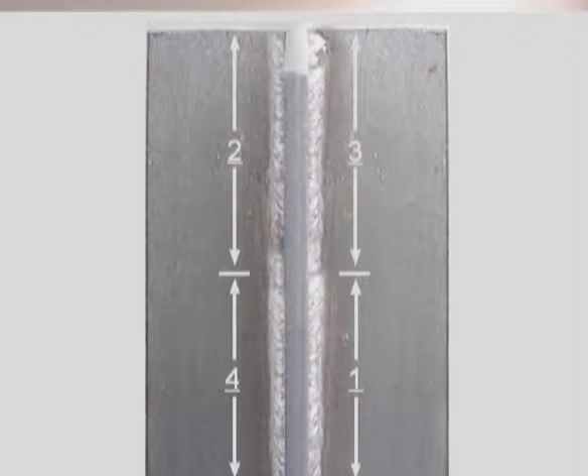Last is corner joints. Depending on the weld position and what you want the finished corner to look like, there are choices in preparation and fit up to provide good penetration. One piece can be beveled at a 45-degree angle, opening it up so you can get the rod all the way to the bottom. The beveled edge is going to heat up quicker than the flat.

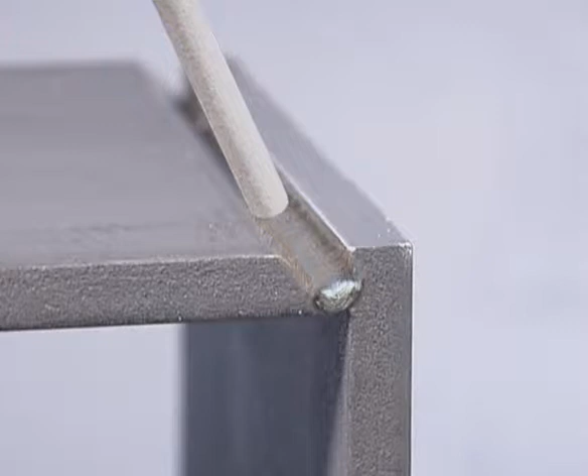Angle the rod into the joint, making sure the puddle flows out and ties into both pieces. A first pass of 6010 or 6011 will provide good penetration and is easier to handle in the bottom of the joint. With 7018, try using a 3/32 diameter rod for the first pass, especially in the horizontal or vertical weld position. Keep the top of the filler beads flat to avoid trapping slag and leave the top edges as guides for the cap.

On thinner metal, you can tack up the pieces without a bevel, then use a grinder to groove the joint. For ornamental type projects, you can grind the weld for a nice square corner.

Corners can also be fit up butting the inside edges. For maximum penetration, tack up leaving a small gap. This type of fit up requires less metal preparation, and for ornamental type work, the weld can be polished for a more rounded corner or ground flat for a beveled corner.

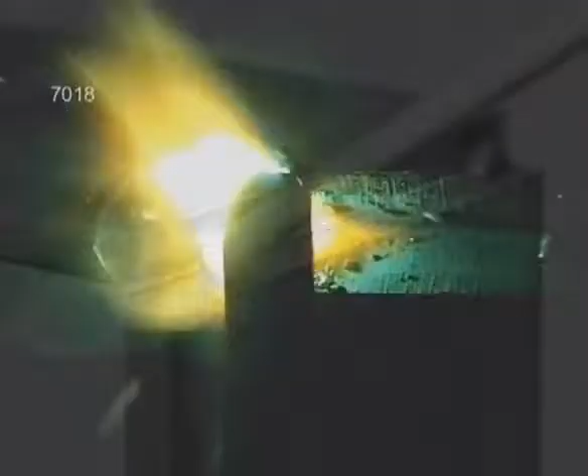In the horizontal position, angle the rod into the corner, fairly perpendicular to the weld, and maintain a uniform arc gap. When both pieces are the same thickness, they should heat up evenly and relatively quick.

With 7018, adjust your travel speed so the puddle flows out to the top and bottom edges, but move fast enough to keep the weld deposit from sagging. Because both edges are heating up quickly, the filler metal will be more fluid, limiting the amount of weld buildup you can handle without having it sag.

If you need to make two passes to fill the joint, run the first one fusing the corner and out to the bottom edge. Use the second pass to fill in the top. On thicker metal, plan the weld, leaving a little of the corners for the final series of passes.

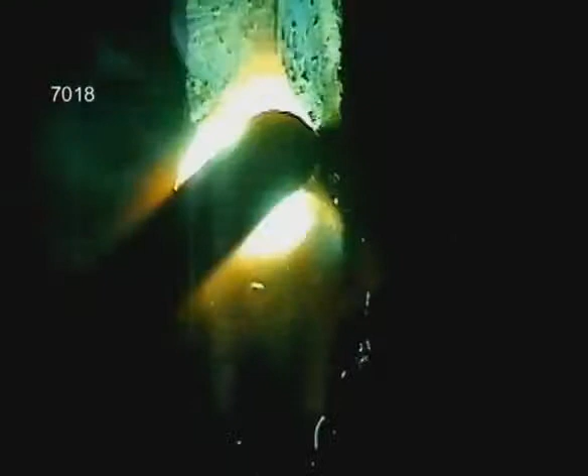In the vertical position, downhill will make a flatter weld and will probably require more than one pass. For vertical up with 7018, the outside edges are going to melt fast, so try using a smaller diameter rod for better control. Pay attention to the arc gap, following the base metals into the corner and along the sides. Keep moving. You won't have to hesitate at all on the outside edges.

On any type of corner joint, you want the amount of weld to equal the thickness of the metal. If you have any concerns about the strength of the joint, you can make a fillet on the inside, but this will tend to draw the pieces in the direction of the weld. Whenever possible, always try to make the outside weld first.

Well, I hope I've given you an idea of how to put two pieces of metal together. There are many more options in metal preparation and fit up to provide for penetration, limit the effects of the metal drawing, and reduce the amount of filler metal deposit.

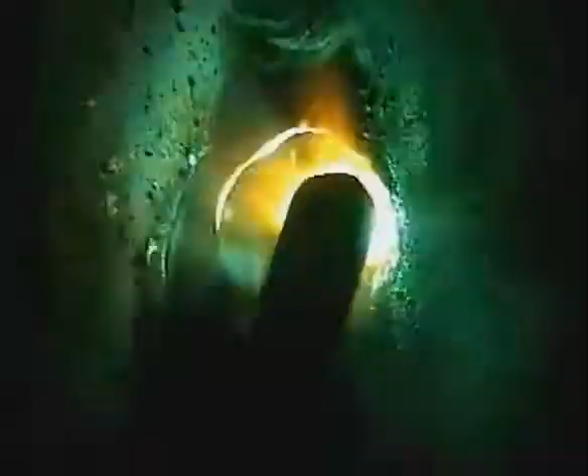Regardless of the type of weld joint you're working on, you need to experiment with the amperage, rod angle, and travel speed, learning to control the amount of weld deposit and figuring out just how much metal you can carry without having it sag or drip. Make slight adjustments in the travel speed when necessary to maintain the puddle and use the rod angle to control the shape of the weld buildup. Focus on the weld puddle, watching the sides tie in and keeping the filler metal from overheating. Above all else, take your time, have fun with this, and work safely.